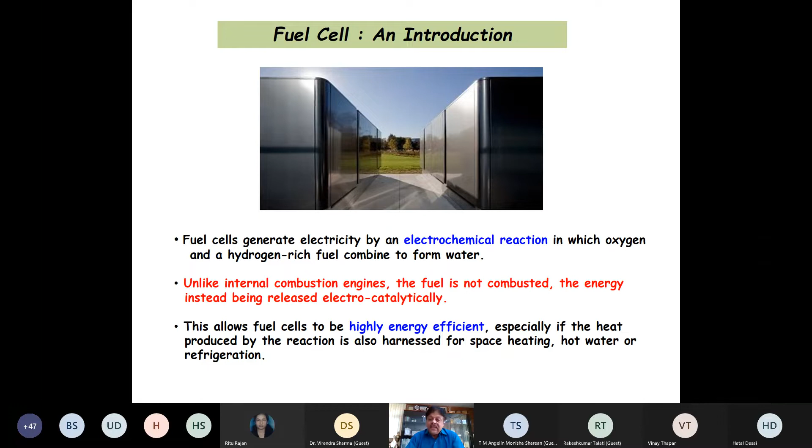Unlike an internal combustion engine, the fuel is not combusted; rather the energy is released electrocatalytically. In that way, a fuel cell is highly energy efficient, especially if the heat produced by the reaction is also harnessed for space heating, hot water, or refrigeration kind of applications.

Now, if we just compare a fuel cell and a battery: the battery is also an electrochemical device, but it is a closed system which generates electrical energy from the conversion of its stored electrolyte. Once this electrolyte is fully exhausted or converted, the battery is depleted and needs to be recharged or replaced.

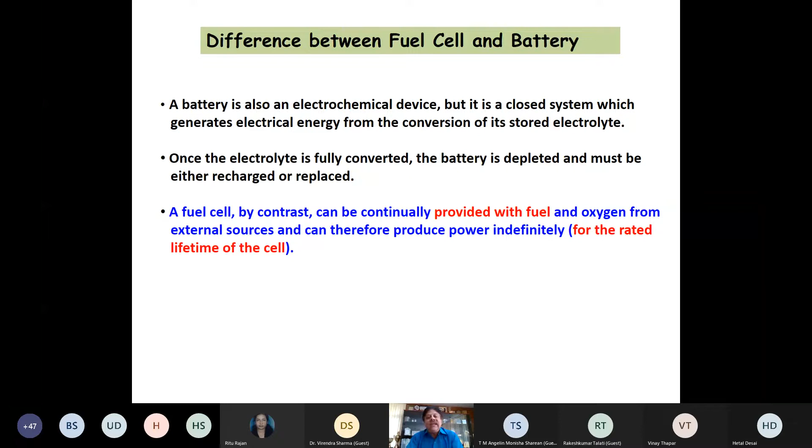On the contrary, the fuel cell is continuously provided with fuel, which is hydrogen and oxygen from the atmosphere, and it generates power indefinitely. But indefinite here means for the rated lifetime—there is some life cycle of everything, and so is with the fuel cell.

Now, if we talk about the history, the concept is not new. The concept of fuel cell was first introduced in 1801. Further, it took around 35 to 38 years. In 1839, William Grove invented the gas battery, the first fuel cell.

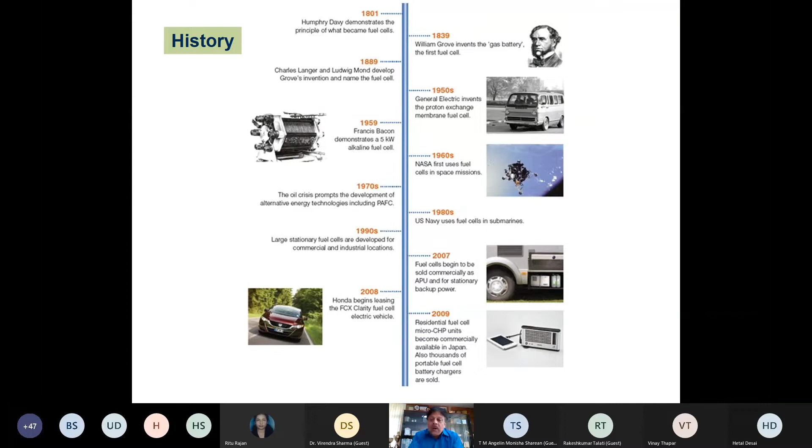Then somewhere around 2007-8, they were explored as a major fuel source for transportation applications. Whereas from 2009-10 onwards, they started being used for low power applications like chargers, etc.

Now, currently, if we review the applications, fuel cells are being used from a few watts or rather milliwatts applications, from toys to large power plants of the order of megawatts. From vehicles where power consumption is a few hundred kilowatts to mobile chargers of a few watts. From household power, that is 1 to 3 kilowatts, to battlefield power, for example radar applications in the military.

The fuel cells are classified into three broad areas. Portable power generation, because we are talking about applications from a few watts to megawatts. Then stationary power generation, where there is no movement, maybe as an alternative to diesel generators. And the third category is power for transportation, which we are going to cover in this particular lecture.

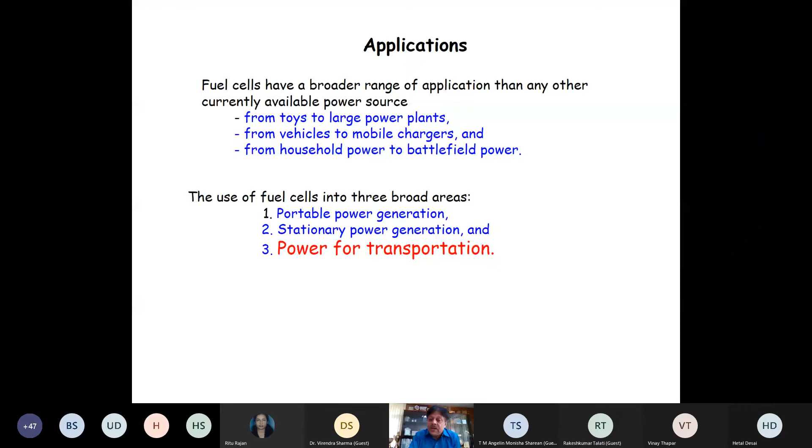Portable power generation through fuel cells ranges from say 5 watt applications to 500 kilowatts. So you can see in transport applications where a 100 kilowatt fuel cell requirement is there.

Here we have hydrogen tanks basically designed in the rooftop of the bus. Then the fuel cell is placed here, and from here we basically have an electric drive system. They will charge the batteries, and then we'll drive the wheel either through the batteries or directly from the fuel cell.

You can also see the application in military use. Many gadgets are being used by military officers, for example night vision goggles and GPS units, and they need to be powered. So these fuel cells can be carried in the backpack, and the soldiers can also keep some spare fuel cell cartridges in case the battery or fuel cell life gets exhausted for that particular duration.

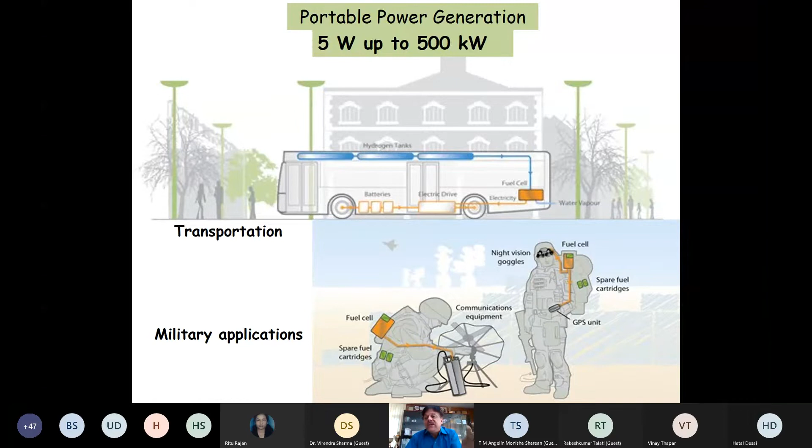Now somewhere around 2012, the hydrogen fuel cell bus was launched in Austin, Texas. In fact, a concept called Zero, that is zero emission resource organization, drove a fuel cell car from Oslo to Monte Carlo in January 2012.

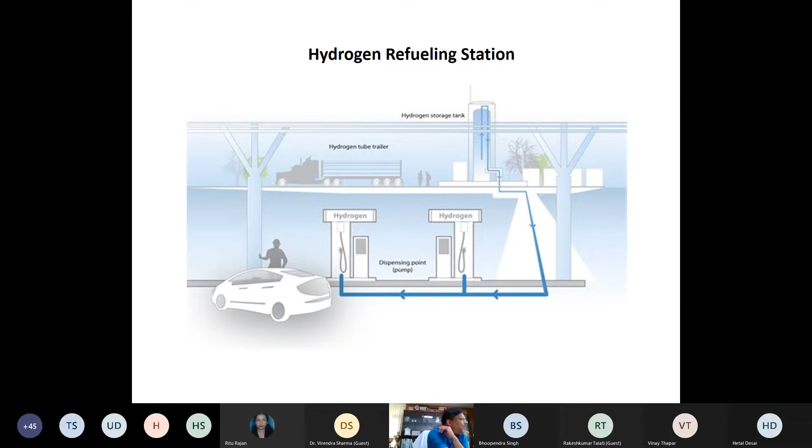Now, of course, like conventional fuels, petrol and diesel engines are available, and refueling stations are available on the entire network, highways and cities. So while we talk about using hydrogen as a fuel for transport systems, we need to think about the refueling station. These refueling stations are very similar to our conventional refueling stations. Even a hydrogen refueling station was built for the Arctic driving center in remote areas some 9 years back.

Coming to stationary fuel cells, in fact there are remote areas where transmission and distribution of power is economically not feasible. For such remote areas, stationary fuel cells might be very useful. For household applications, we can put some fixed capacity fuel cell at the residences, and all electronic gadgets can be powered.

So they can provide electricity as and when needed, or till the availability of fuel. But of course, in such stationary fuel cells, they are not designed to be moved, because our object is stationary. These basically include combined heat and power, and uninterruptible power supply. You may use it for the generation of heat as well. There are countries like US and Canada, where the temperature goes into the minus.

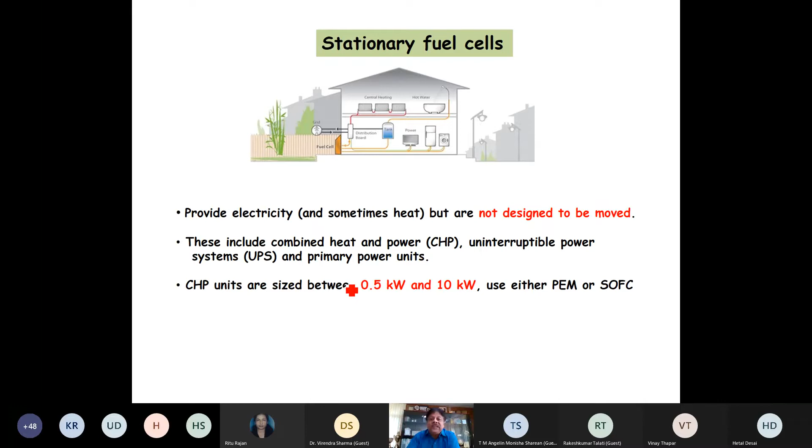Even in India, we are using heaters these days in winter seasons. So for heating applications also, these fuel cells can be used, and they are available for stationary applications in the range from 0.5 kilowatt to 10 kilowatts.

Now the question is how we can produce the hydrogen, how to generate it. Hydrogen is available in abundant quantities in the universe, but very little of it is freely available on earth. So though it is available, it is not freely available, and we need energy to produce the hydrogen. So you may ask, we need energy to produce the hydrogen and then we are using the hydrogen.

So this is basically not meeting the principle of the law of conservation of energy. I'll explain that at a later stage. But one thing is for sure, we need to extract hydrogen from compounds.

There are two ways basically: either we can generate hydrogen by electrolysis or by fuel reforming. By electrolysis, we can split water into its components, H2O. H2O can be split into hydrogen as well as oxygen through the process of electrolysis, using an electric current and water to produce hydrogen and oxygen.

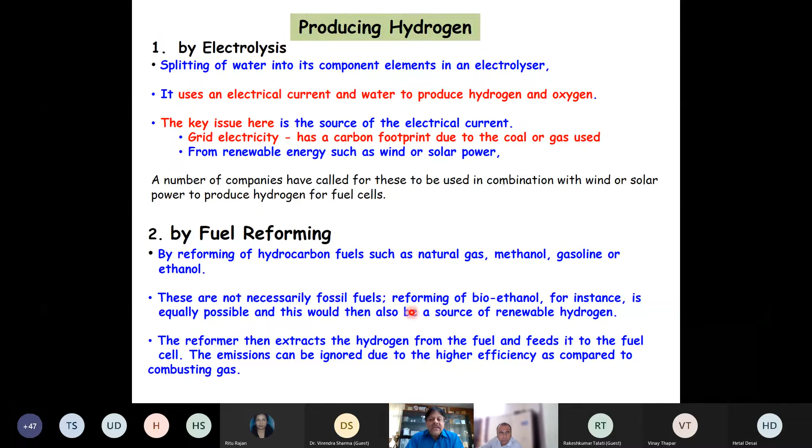We are not self-reliant on petrol and diesel. So in fact, we can use this ethanol for production of hydrogen, which can be used for the production of electricity through fuel cells. These fuels are then not necessarily fossil fuels; reforming of bioethanol, for instance, is equally possible.

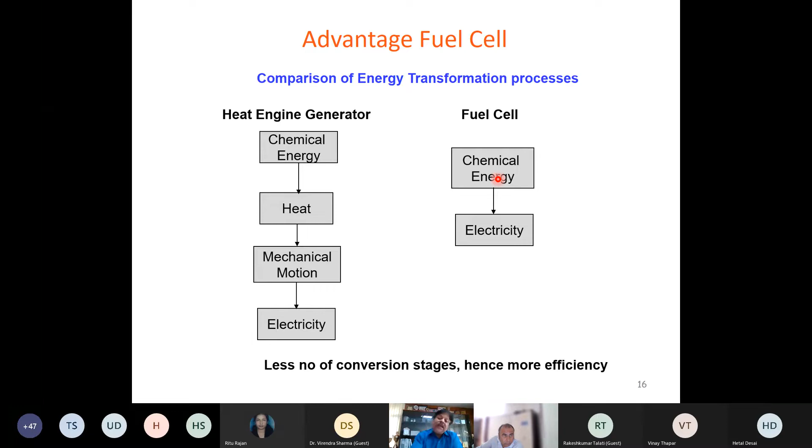Now coming to the advantages. Consider heat engine generators: chemical energy is utilized to generate heat, and this heat through mechanical motion generates electricity. Whereas in a fuel cell, the chemical energy is directly converted to electricity. So there are fewer number of conversion stages, and hence the efficiency is higher compared to conventional heat engine generators.

Now, as far as advantages are concerned, we can see the use of hydrogen as a future fuel, considered to be clean and green renewable power, with portability and suitability for either electricity generation or heat generation. Both ways are possible. Fuel cells can be used for emergency loads. These days, megawatt-scale generation through fuel cells is possible, and we can talk about grid interface for distributed generation.

Fuel cells can help in meeting demand during peak load, like we use hydropower plants for meeting peak load demands, because they can be easily placed into the load or removed from the grid, whereas the base power is provided through conventional sources.

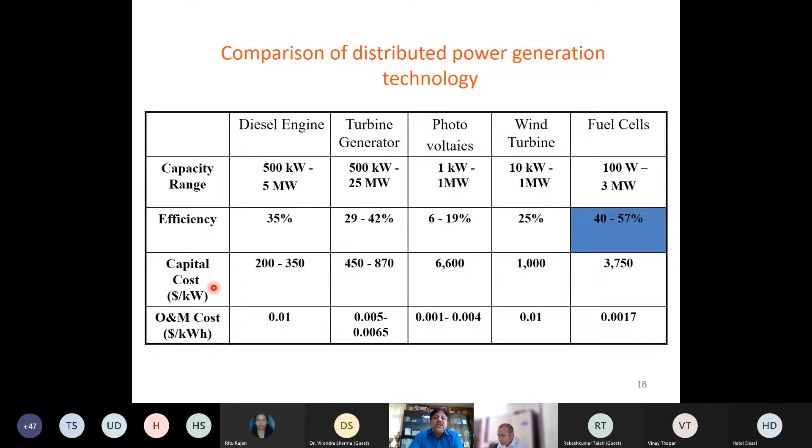But of course, as compared to diesel engines, which not only cause pollution but are also noisy in operation, generation through fuel cell can be preferred. As far as capital cost is concerned, yes, it is a little bit expensive, but in fact one particular component known as membrane, used in fuel cells, is now being manufactured by several companies, and this cost will definitely come down. However, the operation and maintenance cost is also very low as compared to other sources.

Okay. You can see that like

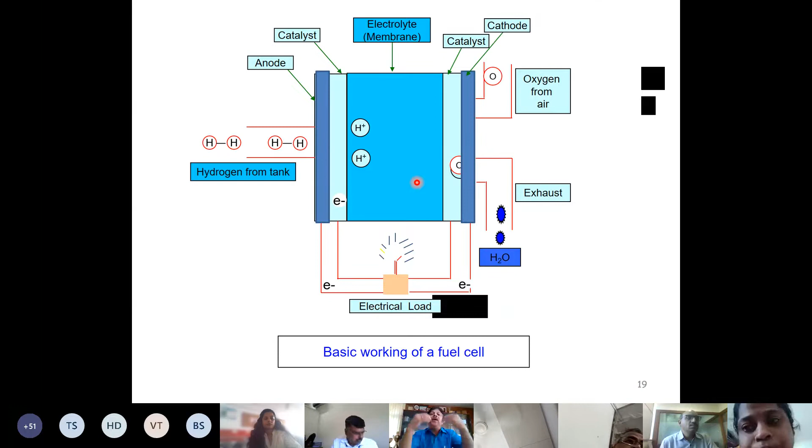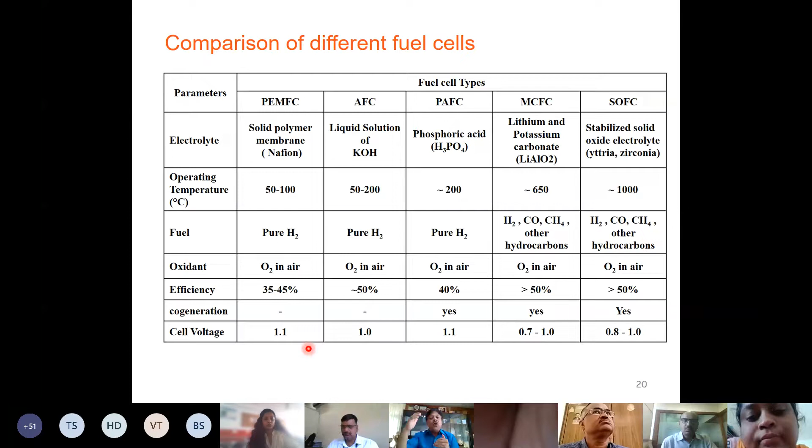These cells are basically manufactured to generate a voltage of 1 to 1.1 volt. Then we'll connect these cells in cascading to make a fuel cell unit rated for either 24 volt, 36 volt, 48 volt and so on. Generally the commercial units are available either in low voltage for low voltage application, or 24, 36 and 48 volt units, and then these units are connected in cascading to generate the high voltage.

Recent development in fuel cell shows that PEMFC is available from 0.1 kilowatt to 100 kilowatt, so basically few watts to few hundred or few tens of kilowatts. Whereas MCFC and SOFC are available in some around 50, 60 and 100 megawatt range as well.

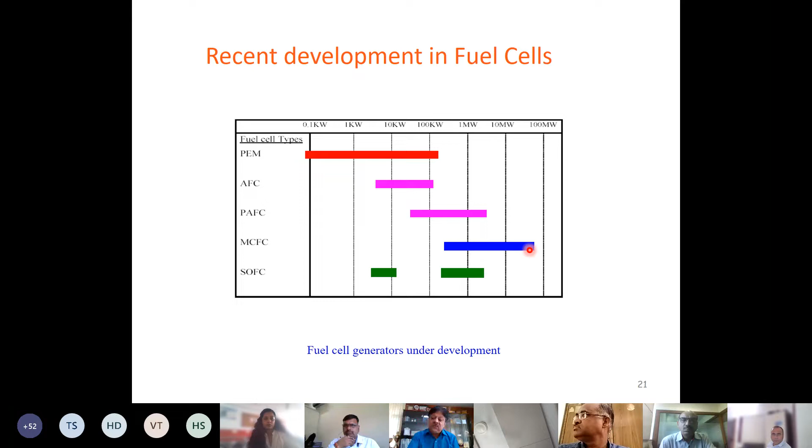So basically you need to model it like a battery. In a battery, this droop is very less. Once we load the conventional battery, the drop in voltage from no load to full load is just 1% or 2%. From 1 volt, it may come down to 0.9 to 0.95, something like that, and that too only after some time interval the battery voltage drops.

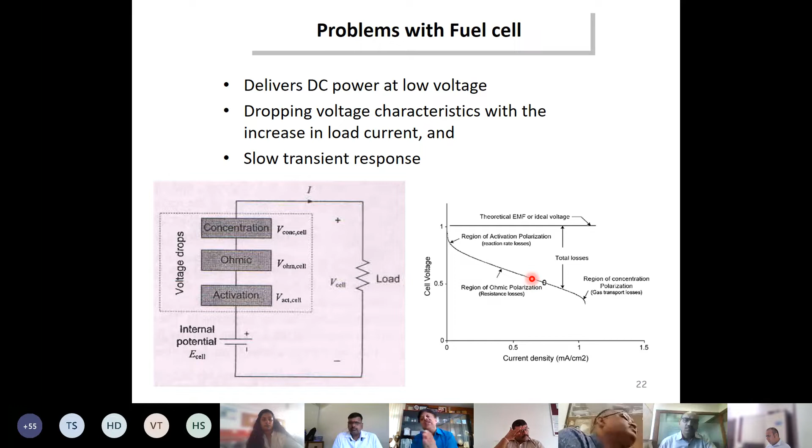But here, this is a significant problem with the fuel cell, and it is very necessary to improve the voltage profile. That is why a big amount of electronics is required to maintain this drooping characteristic. Unlike a battery, even the voltage drop is a bit complicated, classified into concentration region, ohmic region, and activation region. So the reason is concentration and activation polarization, and in between we have the ohmic polarization where the characteristic is almost linear. So to maintain this voltage constant, we use some electronics and power electronics circuitries - that is another area of research.

Now coming to the need of vehicle electrification: we want independency from gasoline, we wish to reduce the tailpipe emission. You must be aware of Bharat 2, 3, 4. Very recently, which version of vehicles are being launched?

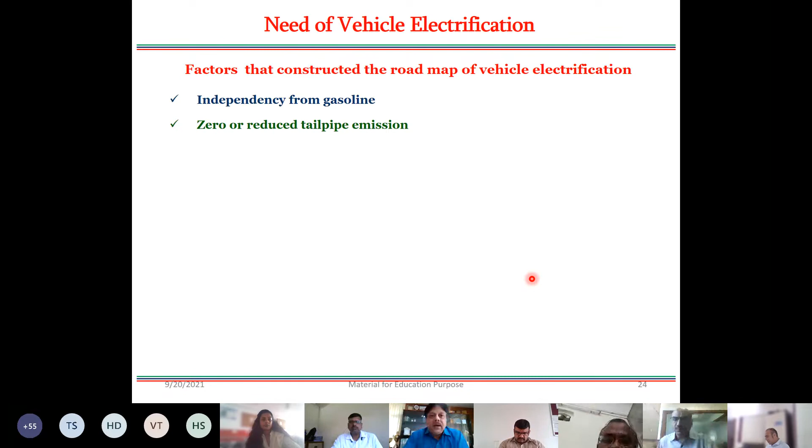BS6. And you might have heard that some car manufacturing companies are now planning to stop a typical type of IC engine based engine, because they are not able to meet the BS standard implemented by Ministry of Transport. So a lot of changes are coming up so that tailpipe emissions should be low.

So I request the participants to go to the Ministry of Transport website, as well as the websites of vehicle manufacturers, to know about the standards being used to control it.

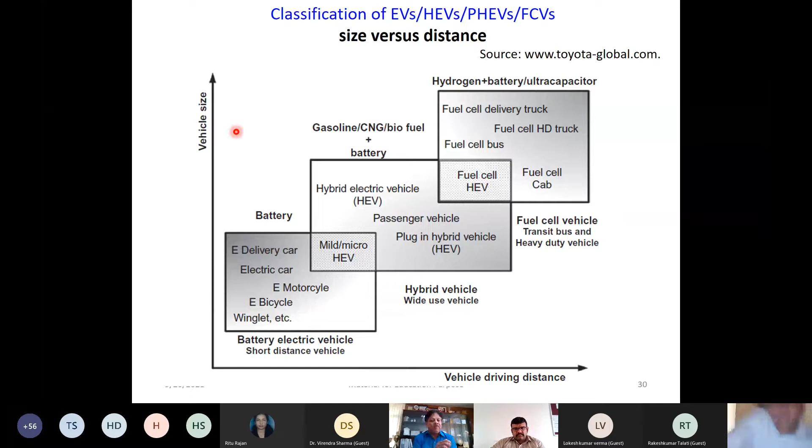Does anyone have any idea about the load of trucks in terms of weight? How much weight can be loaded in commercial trucks used for delivery? Any idea? It may vary from 5 ton to 20 ton.

I am asking because I believe most of you attending this lecture are either teachers or research scholars. So as a teacher, we need to face queries from students, and sometimes we need to encourage them to ask questions.

For cars, you might be aware registration is typically for 4, 5 or 7 passengers. We know SUVs have registration from 5 to 7 including the driver, small cars for 4 passengers, and another category for 4 plus 1 up to 5. Similarly, for delivery trucks, some weight limit is there, as somebody answered, 5 to 20 tons. So that much weight needs to be carried, and the driving propulsion system should be able to produce that much force and torque.

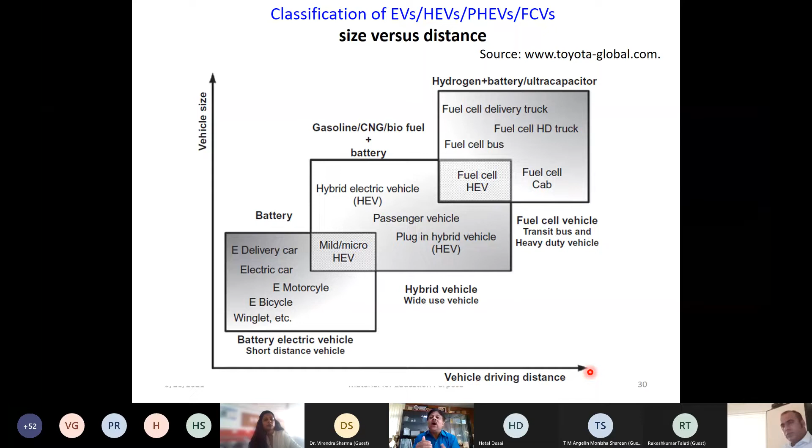After that, we have the third category, FCVs, fuel cell vehicles. They use hydrogen plus battery or ultra capacitors, including fuel cell HD trucks, fuel cell delivery trucks, fuel cell buses, and even fuel cell cabs. They are available in large sizes and can run for even long driving distances. So when talking about a 2x2 bus running from Bhopal to Mumbai or Indore to Mumbai, rather than hybrid or battery operated, we have to go for fuel cell based trucks or buses, which have the particular capacity to accommodate passengers or weight and driving distance as well.

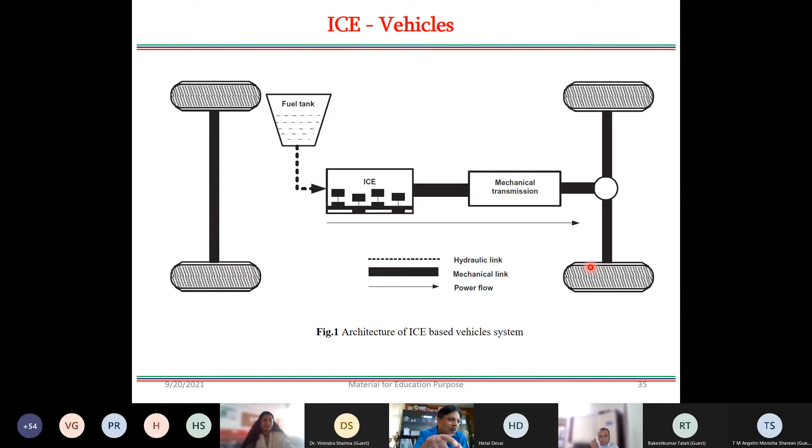When we were students, other than studies we wanted to do everything else. As a teacher, we are expected to teach them the subject, complete the syllabus, and then we expect them to perform well in the exam. Because if they don't perform well, if the result is not good, then I will be blamed - that I'm not a good teacher, I haven't taught well in class. So the key of success lies here. Hope you all agree with me and will follow this practice.

Then coming to hybrid electric vehicle. In hybrid electric vehicle we have two energy sources, one may be battery or fuel cell, and another one may be conventional fuel tank. In hybrid, what we did is gasoline based plus battery. So electrically or schematically there are two sources or more than two sources, and each source will have a power converter, and power may flow from source to load and load to source.

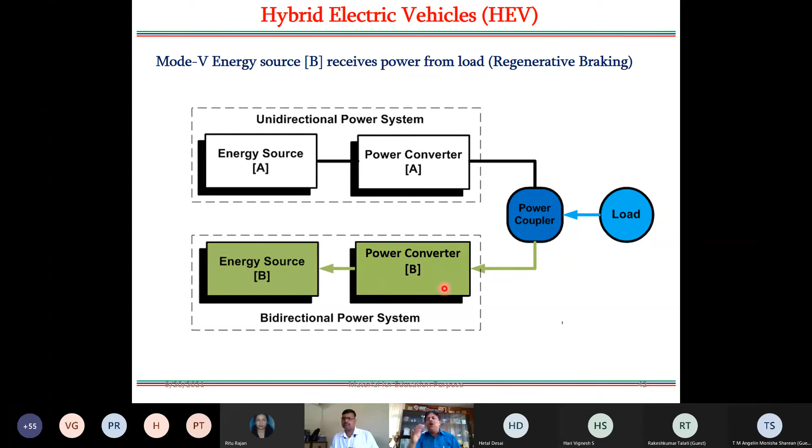But you must have noticed, when you put it in free running mode, the vehicle will go with gravity and your speed will increase, so your control comes onto the brake, isn't it? We will lose control on gear and entire control will come on brake, which is really dangerous. But that is the way we can have regenerative capability, because the speed of the prime mover is higher and battery voltage is low, so we can feed power from load to source during that.

Then we'll have another mode where energy from source A supplies power to the load and source B simultaneously. What we are doing is feeding power to the load through source A, and at the same time charging the batteries as well. And one more option is there, when energy source B receives from energy source A and load, both sources are now charging the battery.

So the purpose of indicating the possible modes of operation of electric vehicle, where we have more than one source, is that we need to control the flow of power from one source to load, from source to another source, from load to source A or source B, etc. So a lot of control options are required, and having a good controller is one of the requirements or needs of a hybrid electric vehicle.

Now, until now what you were seeing was the pictorial view in block diagram form. Now let's come to the classification of hybrid electric vehicle, where we are talking about series, parallel and complex. So what is series HEV? Series HEV, again hybrid is conventional internal combustion engine plus battery. So you can see that I am having a fuel tank, I am having an internal combustion engine, and the batteries are there.

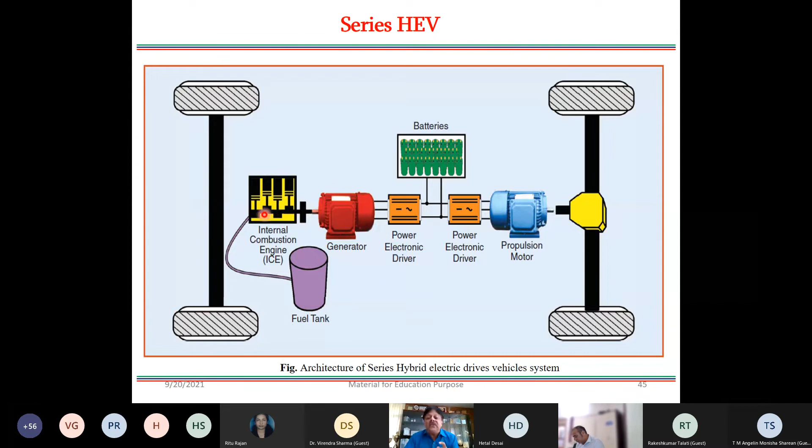So either you can feed from the IC engine directly only, you can feed only by batteries, or we can feed through both sources, with batteries also being charged from the IC engine. Then we'll have the parallel hybrid electric vehicle.

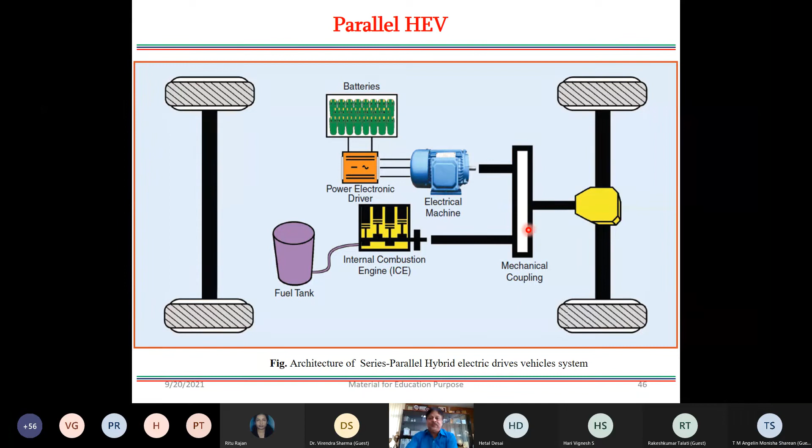In parallel hybrid electric vehicle, these two sources are connected in parallel. So either we can only feed through batteries, only through the IC engine, or feed both of them in parallel. This type of architecture is called parallel hybrid electric vehicle.

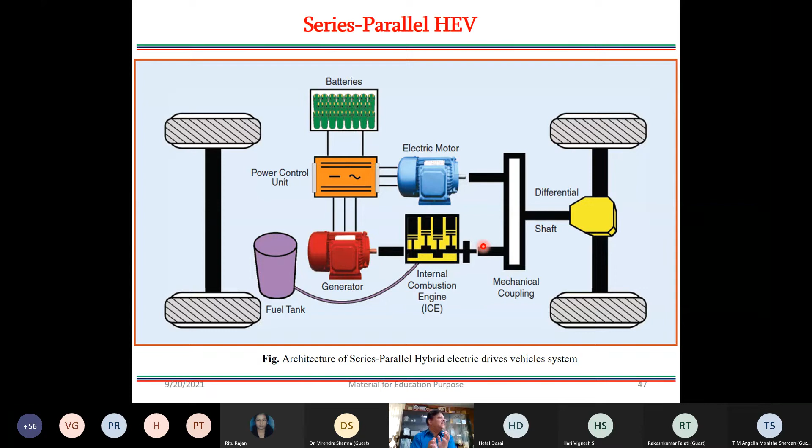Then we'll have the series-parallel combination. Here, the batteries and IC engine are connected in parallel. At the same time, a series combination is also made from the IC engine through a generator and controller to the motor or to the batteries. In that case, the mechanical power has to handle a differential power of these two.

That will put a different kind of challenge on the mechanical component. Then we'll have a complex HEV. So far we have placed the batteries here and a fuel tank. Now here you can see a fuel tank, IC engine, and electric storage through a power electronic converter, with two different motors.

You must have heard about four-wheel drive systems, isn't it? Four-wheel drives where the driving propulsion force is provided to both the front wheel and rear wheel, just to give more power.

So can some of you tell me, the car we drive in cities, is it two-wheel drive or four-wheel drive? The car generally we use is two-wheel drive. Four-wheel drives are generally used where a large amount of power is required, in hilly areas or where roads are not there.

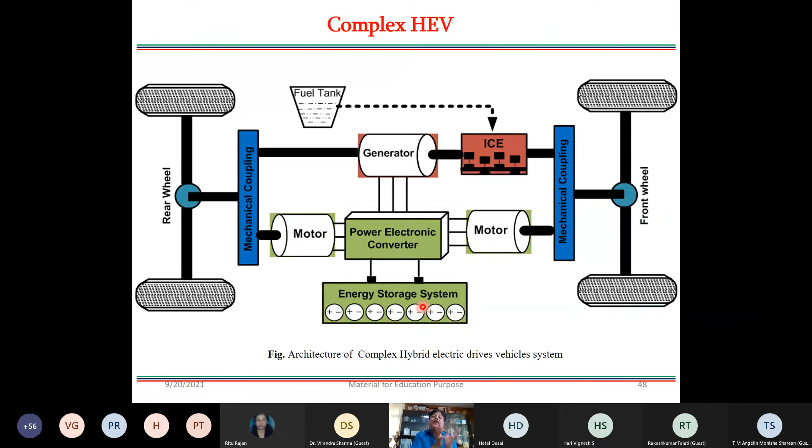So basically, providing the propulsion force to both front wheel and rear wheel through the IC engine and electric battery system, via converters and electric motors, will pose a big complexity on the system.

Now we'll have one more category: plug-in hybrid. For plug-in, we charge the battery. So far we did not talk about how the battery is going to be charged. The moment PHEV comes, it means this battery is fixed and we use grid power to charge the batteries. Then we'll have some energy storage system, power converters, motors, and of course the conventional fuel tank through the IC engine providing the propulsion force.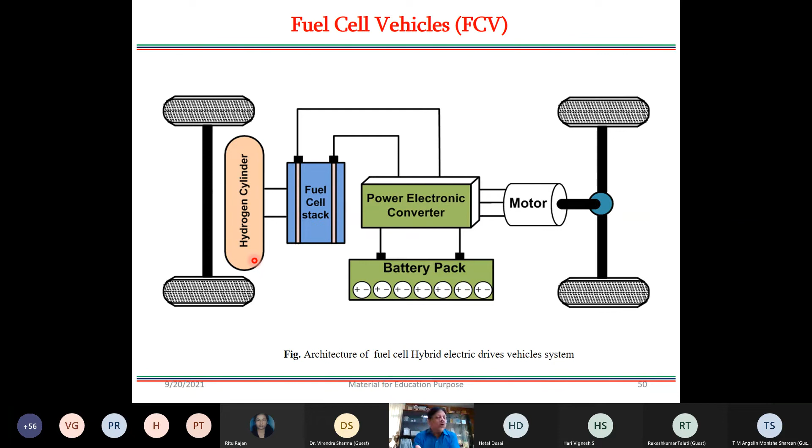this is an easier and better option in that we still have a fuel tank, but instead of conventional fuel there is a hydrogen cylinder. There's probably a mechanism to refill this fuel, and as I mentioned earlier, research is going on into how to generate, store, and transport hydrogen, as well as how hydrogen refueling stations can be built. So we are projecting fuel cell electric vehicles as the future generation of fuel.

For an electrical electronics engineer, another challenge is vehicle-to-grid and grid-to-vehicle. Now your car with a fuel cell is basically a power plant; it can generate power. So if you are staying in a remote area or a place with no electricity available, you can use your car to produce electricity and feed the house.

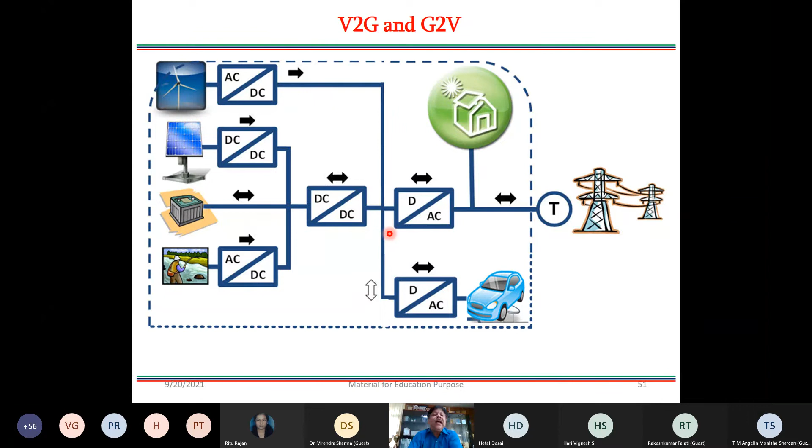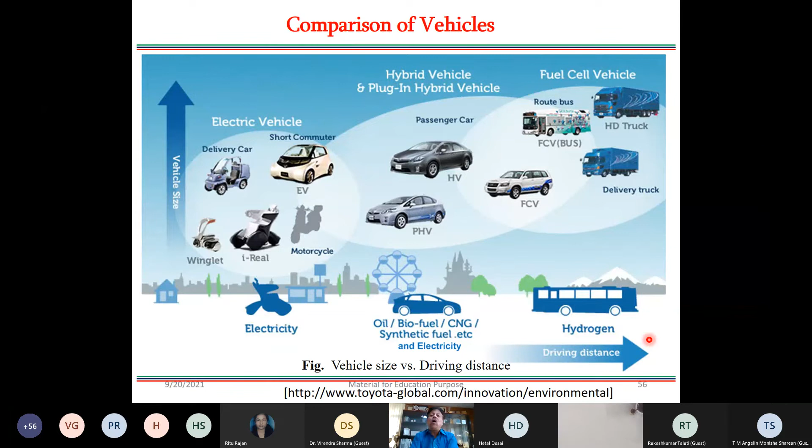This is another picture, giving a real picture with visualization of vehicle size versus driving distance, similar to the table shown earlier in block diagram form. You can see small vehicles and cars, then plug-in hybrid vehicles, our conventional passenger cars, then fuel cell vehicles, HD trucks, delivery trucks, FCV buses - they can go for a longer distance without causing pollution, even for large size vehicles.

There are some components of electrical propulsion systems: energy source and storage system, power electronic converters, electric motors, and ECU. As I told you, when we control the power flow from one source to another, the electronic control unit has to play a very important role.

As far as electronic controllers are concerned, we'll have both hardware and software based tools like microprocessor, microcontroller, DSP, FPGA, dSPACE controller. Then type of control methods, whether V by F control, field oriented control, direct power control, MRAC based controller. Then we use intelligent techniques like genetic algorithm, artificial neural network, fuzzy based controllers - these are all part of the electronic controllers.